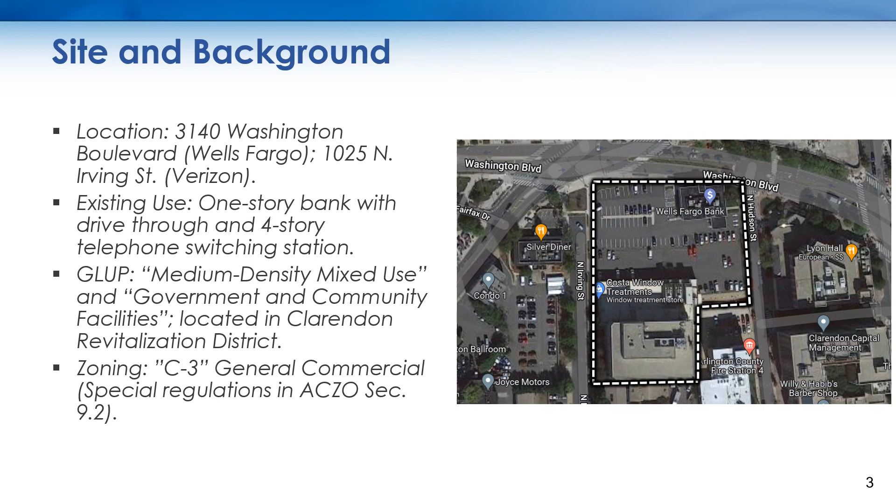We are currently discussing the new site plan and use permit for the drive-through ATM. Here is an overview of the applicant's proposal for the Wells Fargo site: a mixed-use building with 238 dwelling units, 2 floors of office space, and a large ground floor retail space, including a new Wells Fargo bank. There is a proposed drive-through ATM use associated with the bank. It is 12 stories and 128 feet.

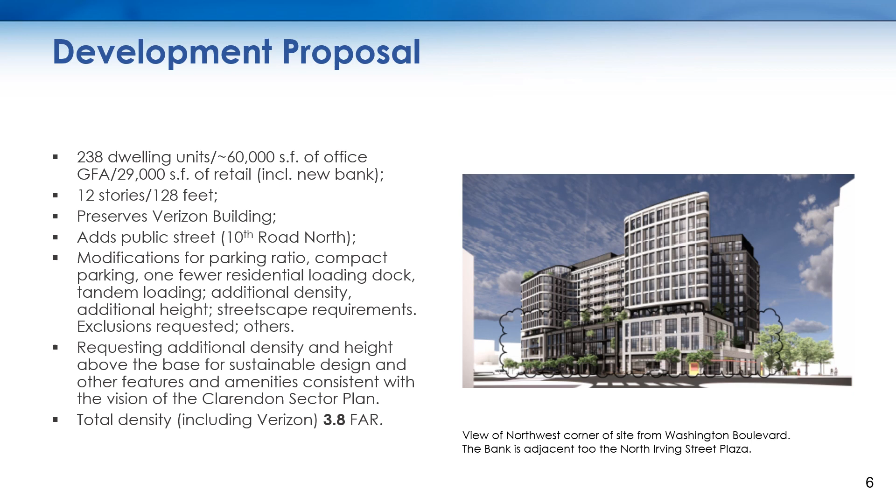The Verizon building will be preserved. The development adds a new public street to the rear, 10th Road North, and the applicant is requesting numerous modifications to make this development possible, including additional density that will add up to about 3.8 FAR over the entire site. We are using as our site guidance the Clarendon Sector Plan update as adopted by the County Board in April 2022.

Many aspects of the sector plan have actually been codified in the Arlington County Zoning Ordinance, Section 9.2. So many of the recommendations of the sector plan are not just recommendations, they are requirements of the zoning ordinance, which the applicant will occasionally propose to modify.

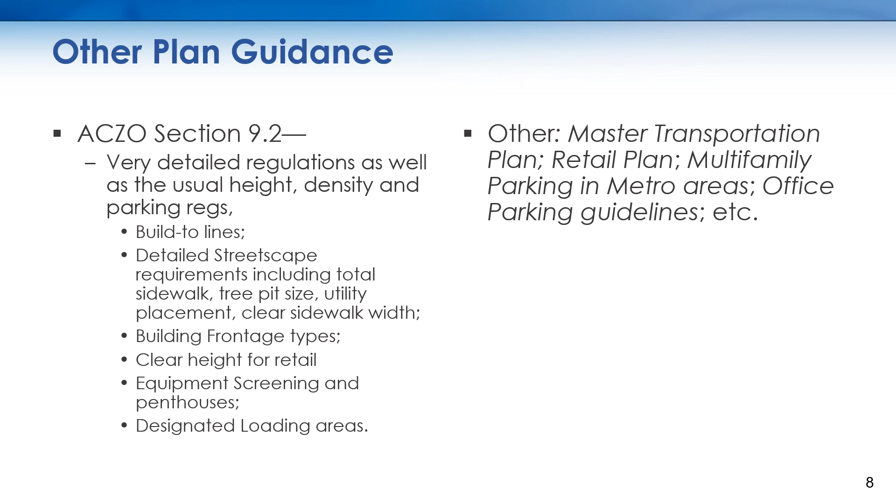The first part of the public review process has concluded. It was an online engagement period between January 9th and 20th, 2023, with 38 unique commenters.

Almost all of the commenters were negative about the presence of the drive-through ATM. Most commenters felt the bank was an acceptable use adjacent to the public open space if the design of the bank could be improved. There were no strong feelings for or against architecture above the ground level. Commenters, though, wanted an active ground level and were interested in clarifying if retail could be accessed by the new 10th Road. Almost universally, all commenters wanted to see more landscaping and green space.

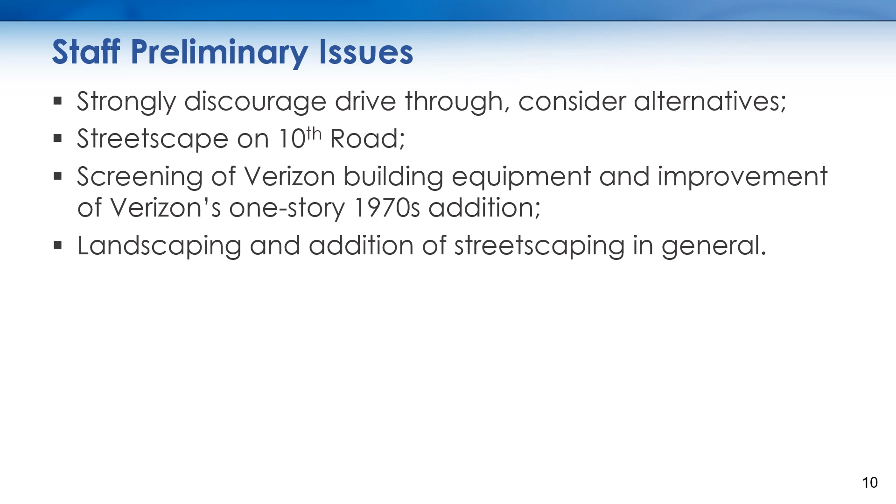A review of staff's issues, not limited to the items listed, includes: staff strongly discourages the drive-through, and the applicant should consider alternatives; improvement of the streetscape on 10th Road North; screening of the 1970s addition to the Verizon building; and landscaping and streetscaping in general, including compliance with zoning ordinance requirements. Tonight's topic is about building form and architecture, but we'll also be discussing the ground floor uses.

The Clarendon Sector Plan has broad goals to provide a quality public realm, accessible and connected places, and a rich mix of uses, and we will be evaluating this project in light of advancing these goals.

Clarendon therefore has form regulations to help implement those goals of the sector plan. These form regulations, also codified in the zoning ordinance, include required tapers and step backs, height limits that vary block by block to provide a variety of heights in Clarendon, required build-to lines, urban design requirements like building entrances required every 50 feet, transparency requirements, and service requirements related to the new 10th Road.

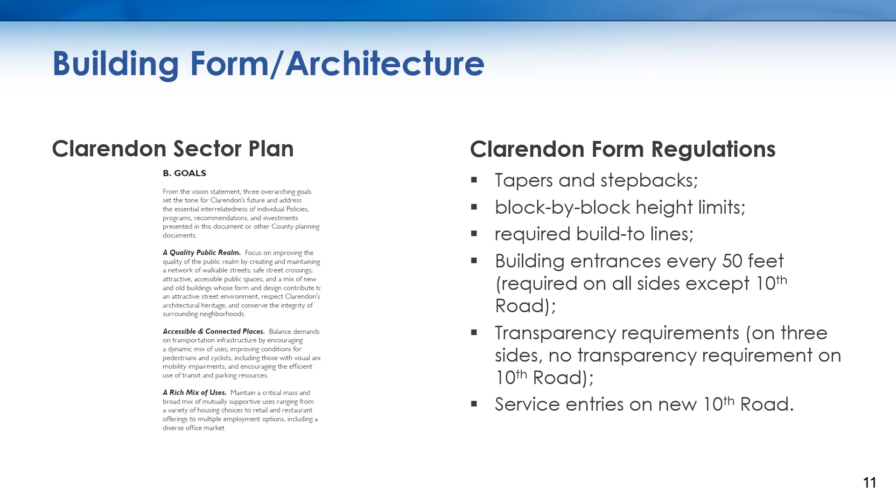The building form guidance in the sector plan requires a maximum height of up to 128 feet in exchange for community benefits. One taper or step back is required on the west side facing the Irving Street Plaza. That's a minimum 10-foot taper that should be on the second through fifth floors.

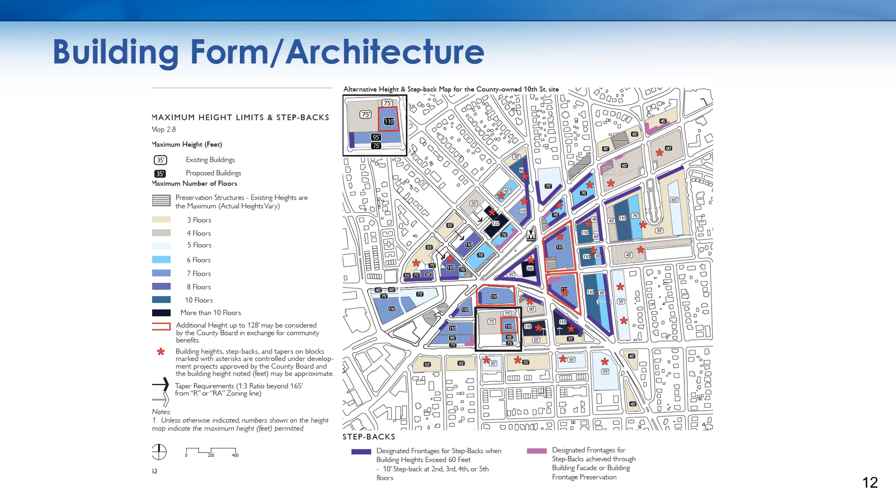This site is designated a Main Street site on 3 sides. That prescribes the ground level building form. Building entrances should be every 50 linear feet approximately. There should be a minimum 75% facade transparency on these sites.

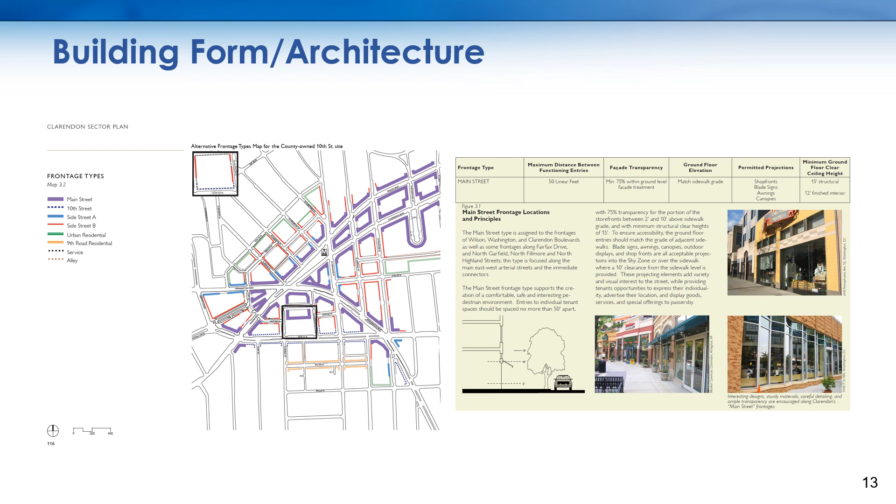The 10th Road North frontage, however, is designated for alley and service uses. So there are no transparency requirements or doorway requirements, although the developer will be providing some on that side, as you will see in their presentation.

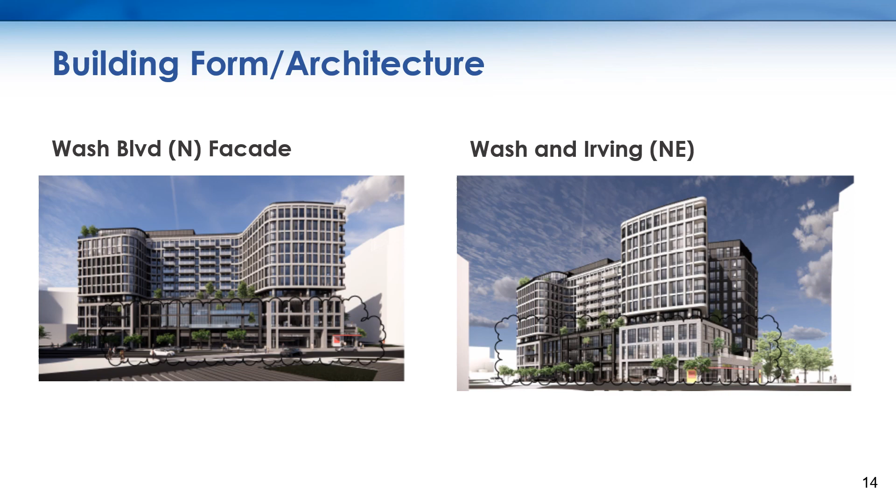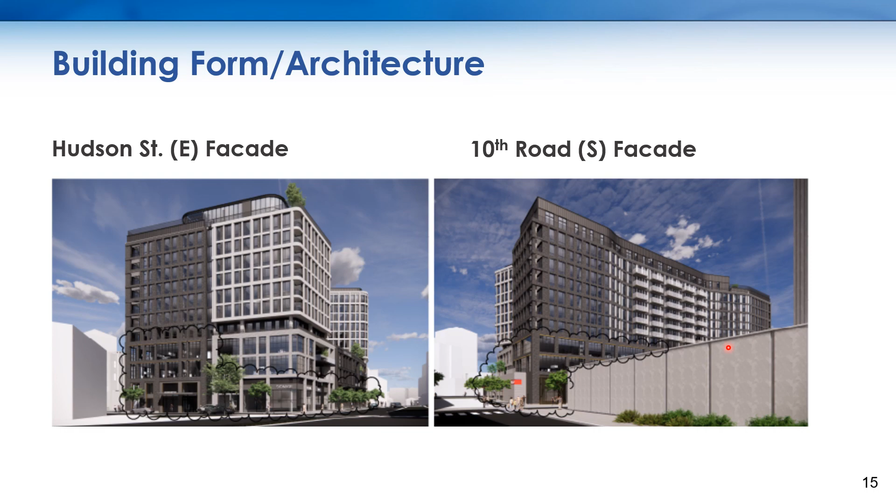Here are 2 facades, the Washington Boulevard North facade and Washington and Irving Northeastern facade. Hudson Street and 10th Road South. The large blank wall is the 1-story 1970s Verizon addition that staff would like the developer and Verizon to commonly address.

I spoke about the regulations before that are codified in the zoning ordinance of urban design factors. The developers generally meet those guidelines and regulations for the build-to line, the height, and the step backs. Staff has encouraged the developer to work on compliance with the sector plan and zoning ordinance requirements for ground level fenestration and building entrances, especially on the bank side on Irving Street facing a proposed public plaza.

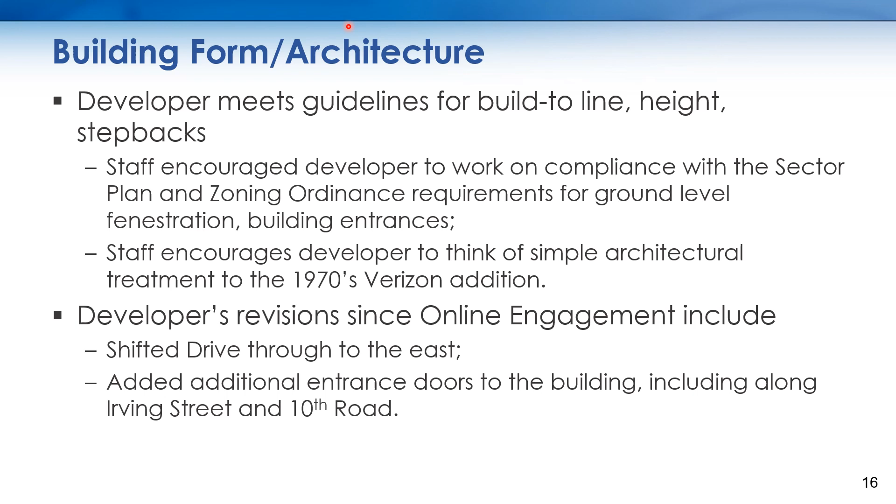Staff encourages the developer to think of simple architectural treatment to the Verizon building to the south. The developer has made some revisions to the plan since the online engagement, and those include, and you will see in their presentation, they have shifted the drive-through to the east and added additional entrance doors to the building, including along Irving Street and 10th Road.

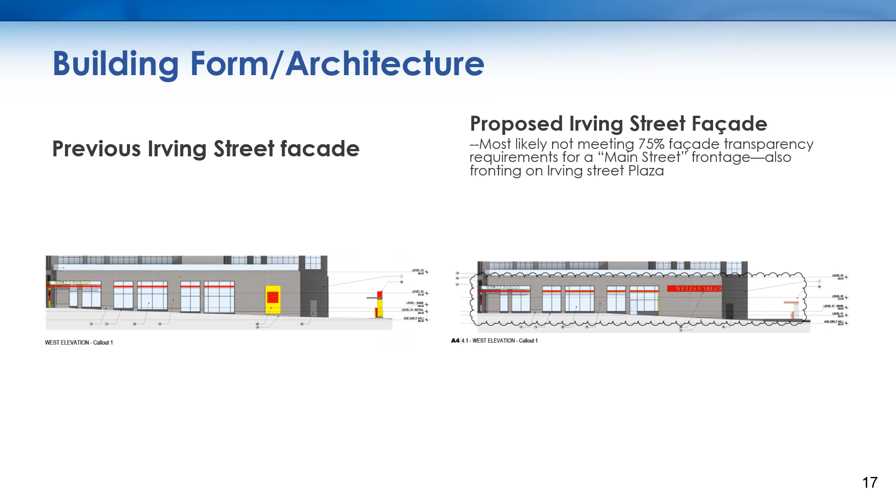In the new facade proposed on the right side of the screen, the developer has added a door to the Irving Street side of the bank. Remember, this is the side that is going to face a new public open space. However, the developer has not been able to address the 75% wall transparency goal for that Main Street frontage side of the building.

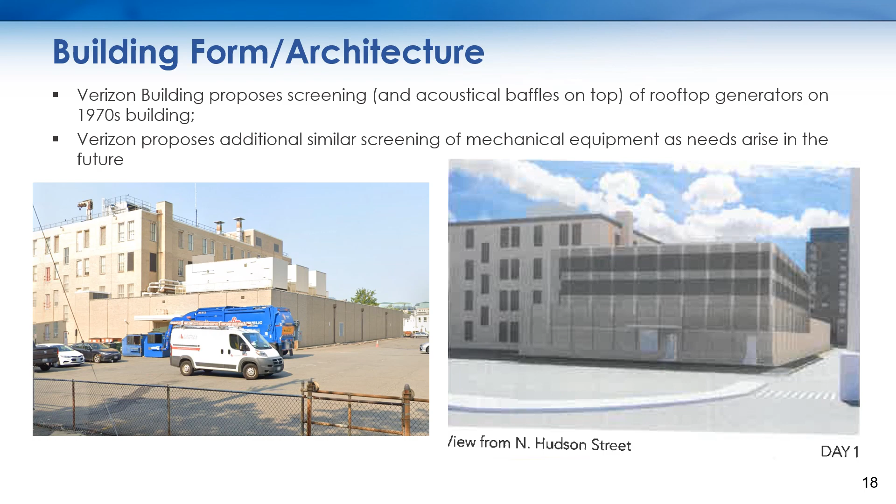Verizon proposes screening and acoustical baffles to hide rooftop generators on the 1970s addition to the Verizon building, and Verizon will propose additional similar screening of mechanical equipment as needs arise in the future. Here's a slide showing the proposed screening features on Verizon.

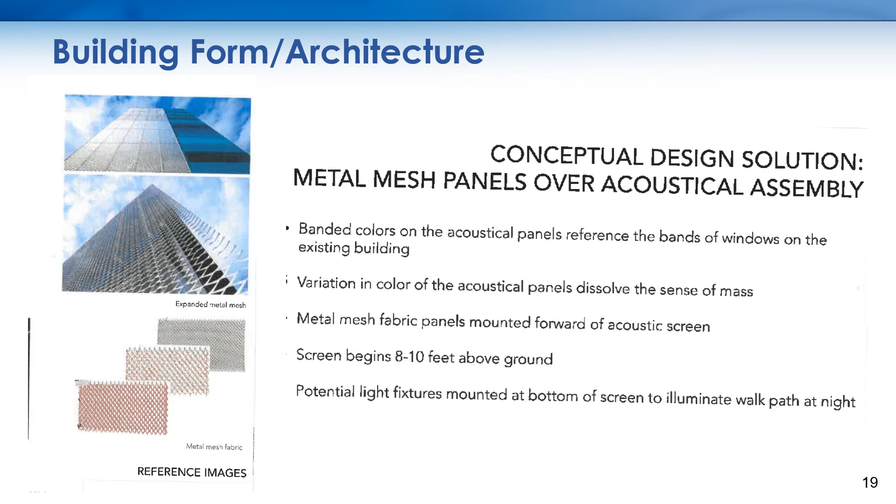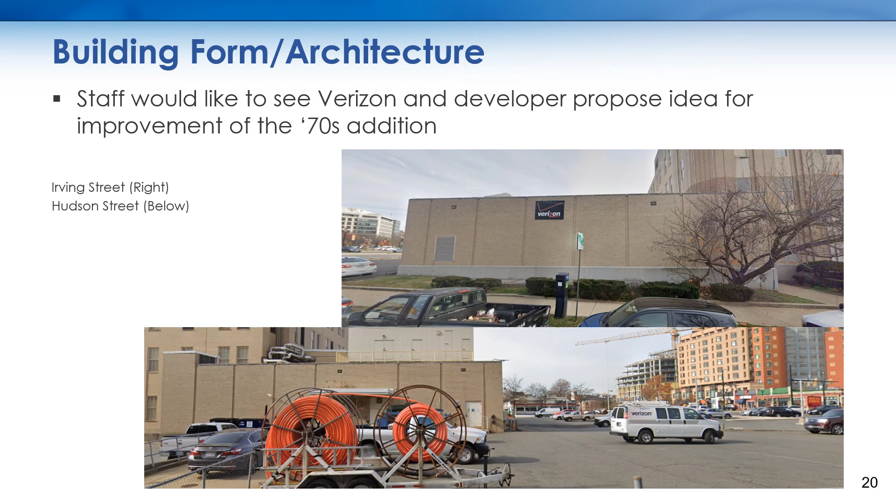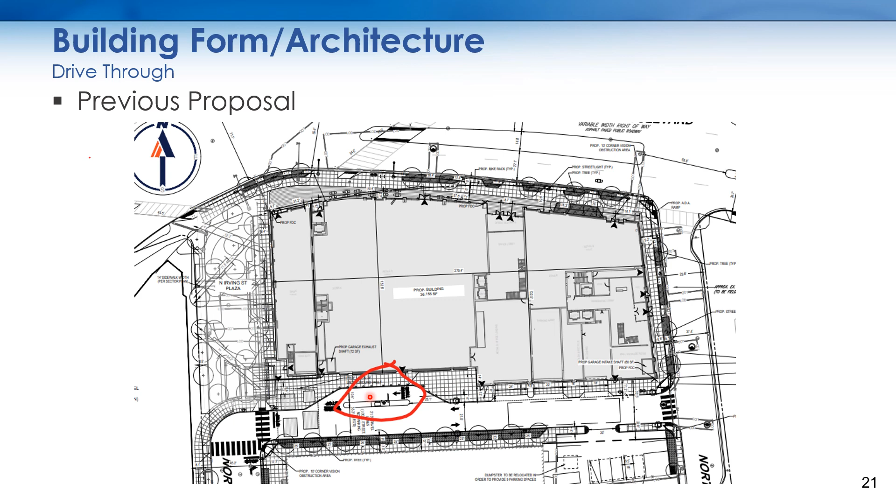The developer's previous proposal placed their proposed ATM closer to the Irving Street Plaza here, a public plaza which will be developed by the county, and no street trees on the north side of 10th Road. That does not follow the guidance of the sector plan nor the zoning ordinance.

In the developer's latest revision, they have shifted the ATM drive-through a few feet to the east, also reducing somewhat a corner of the side of the building, and placed street trees on the north side of 10th Road.

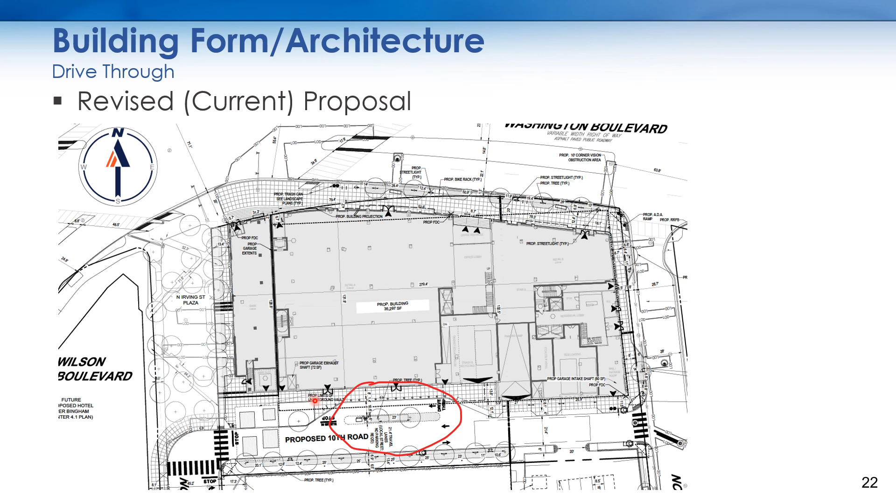Again, staff strongly encourages Wells Fargo, who are the current owners of the site, and the developer to find an alternative to a drive-through that comes off of the street, perhaps with a walk-up window or an interior drive-through in a parking garage, perhaps.

As far as public process goes, the online engagement, as stated earlier, went January 9th through 20th, 2023. This is the video for the SPRC meeting number 1, February 27th, 2023. There will be at least one more SPRC meeting, and public hearings and county board dates have yet to be determined.